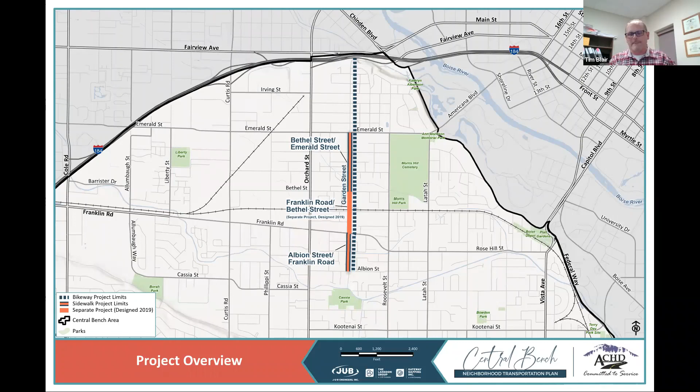Well, we're here to present the design for the Garden Street section of the Boise Central Bench Neighborhood Bike and Pedestrian Plan. We want to first offer some background information on how we got here and where we're at in the design phase.

Thanks, Rebecca. The Garden Street Sidewalk and Bikeway Project is a first step in creating a completed north-south pedestrian and bicyclist route on Garden Street. It goes from Cassia Park all the way up to the Boise Greenbelt. This project will improve safety and increase connectivity for pedestrians and bicyclists.

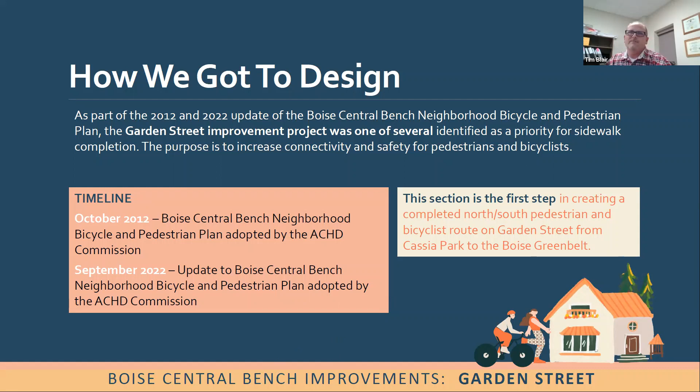In 2012, and 10 years later in 2022, ACHD worked with neighborhoods on the Boise Central Bench Neighborhood Transportation Plan to improve walking and biking on the Boise Central Bench. Both plans identified Garden Street as a priority north-south corridor for pedestrian and bicycle facilities. On the next two slides, you'll see why the entirety of the improvement and project was identified as a priority project for this sidewalk completion.

Let's take a look at the bird's eye view of the Central Bench plan. This first map, figure 4.1b, is from the updated 2022 plan. It shows the entire Central Bench area along with the pedestrian and ADA improvement projects identified in the project area. The blue lines show pedestrian and ADA improvement projects within the Central Bench project area, and here you can see highlighted in yellow is the Garden Street section.

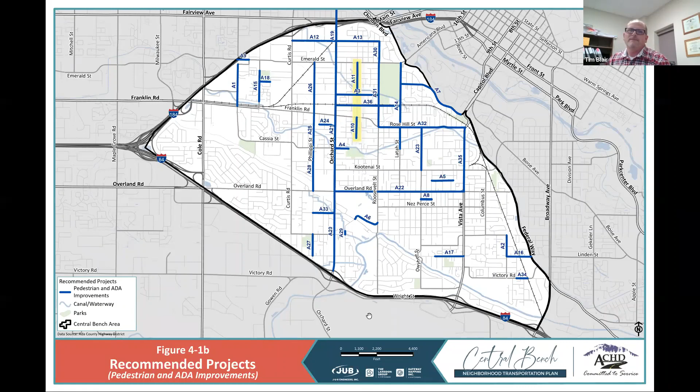Next slide, please. This second map, figure 4.1c, is also from the 2022 plan. The dashed blue lines depict the recommended bikeway and bike treatment projects, and here you can see highlighted in yellow is the Garden Street section as well.

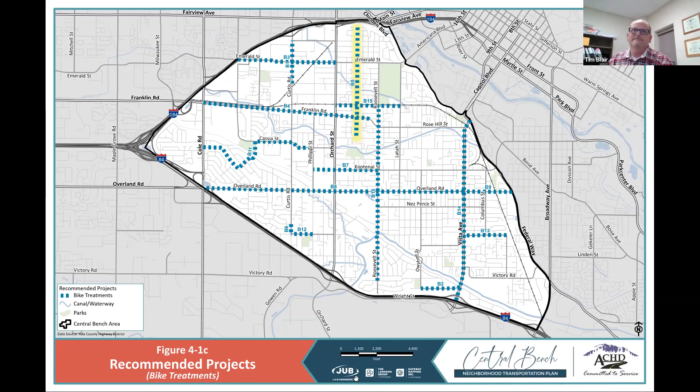We are curious what type of transportation you primarily use on Garden Street, and you can pick more than one. Do you drive a car, truck, or motorcycle? Do you bike? Do you walk? Do you roll, wheelchair, scooter, etc.? Do you take public transportation, a bus or a van pool? Or do you not use this segment of Garden Street, or other? Please specify in the chat. I'll give you a couple seconds to include your answers.

Okay, Rebecca, what do we get here? Okay, 79% of our participants today drive a car, truck, or motorcycle. 64%, which is really high, use bike and also walk. We do have someone that uses alternative mobility such as a wheelchair or scooter, etc. And then 7% is other. This is great, thank you.

Okay, now that we've taken some time to look at the big picture, we can jump into the proposed design. We'll do this by looking at the overall proposed Garden Street layout and then dive into the design and details of each project section to look at the overall bikeway project, and also discuss some of the features such as bulb-outs, etc.

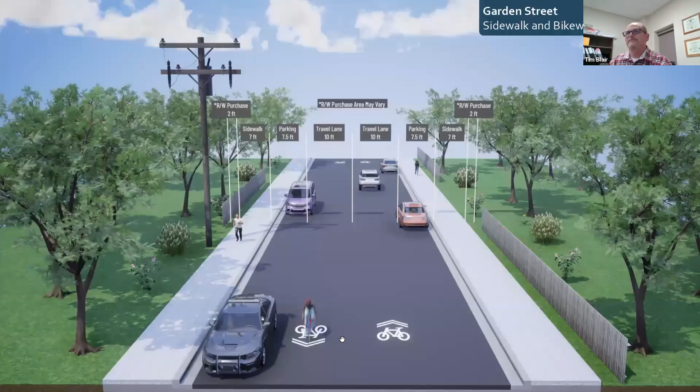Here you can see the overview of the proposed design. It includes sidewalks that are 7 feet wide on either side of Garden Street, and on-street parking that's 7.5 feet wide. This segment up and down Garden Street also includes 10-foot travel lanes. We've also shown a 2-foot strip on both sides of Garden Street for purchasing right-of-way and property needed for this project.

With this rendering, you can also see some of the other features in this typical section: the addition of curb and gutter and sidewalks on both sides of Garden Street, from Albion Street to Franklin Road and Bethel Street to Emerald Street. We'll also reconstruct some existing sidewalks as necessary, adding bulb outs at key locations and pedestrian ramps. Later in the presentation, we'll talk more about those and some of the benefits.

Most of the on-street parking along this segment will be retained. However, some parking will be impacted, especially near bulb out locations.

Now that we've taken some time to look at the overview of the proposed design, next we'll zoom into more of the project-specific details of the street sections.

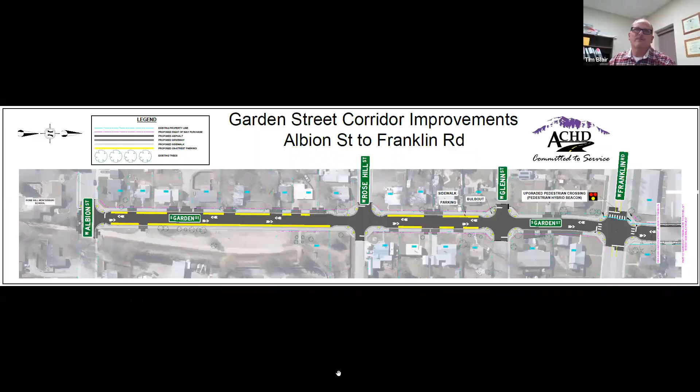The next segment we're going to talk about is Garden Street from Bethel Street to Emerald Street. This is similar to the design of Albion Street to Franklin Road. Rebecca, can you pull up the next slide, please?

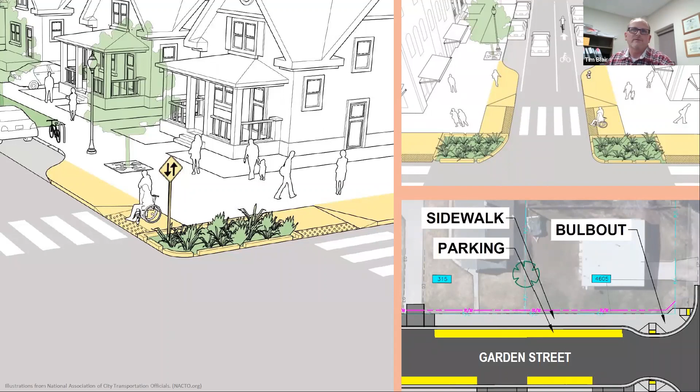They provide space to install ADA compliant pedestrian ramps on existing sidewalks where they are otherwise too narrow. They also provide additional visibility and protection for pedestrians when crossing the street, and reduce pedestrian exposure to vehicles by reducing crossing distance. Some challenges with bulb outs: they require eliminating some on-street parking near the intersections where they're installed, and sometimes they may be difficult for large delivery trucks to navigate.

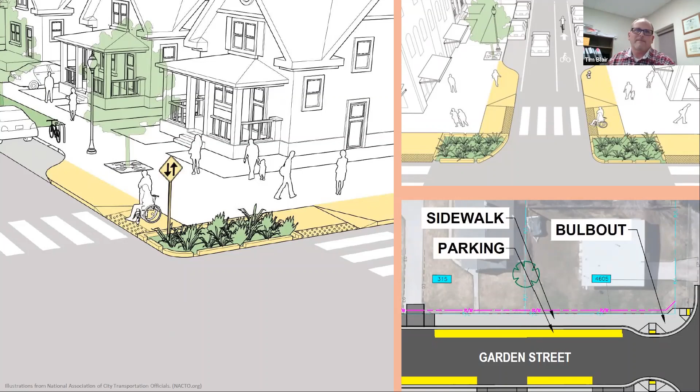Your comments are always welcome, and it's helpful if we can receive those by November 16th, 2022, when the comment period closes. ACHD will then review and address the comments received from the public.